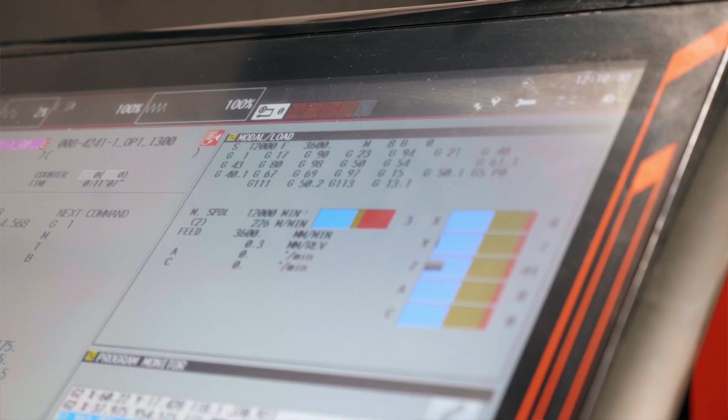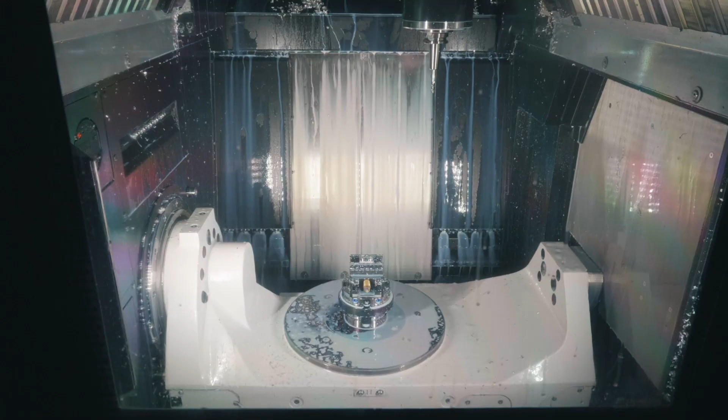As a small country at the bottom of the world, we are full of ideas, but as far as making them goes, we're a little behind. We need to invest in technology to compete globally. I could see the high-tech innovation coming down the pipeline and saw an opportunity to partner with those high-tech companies.

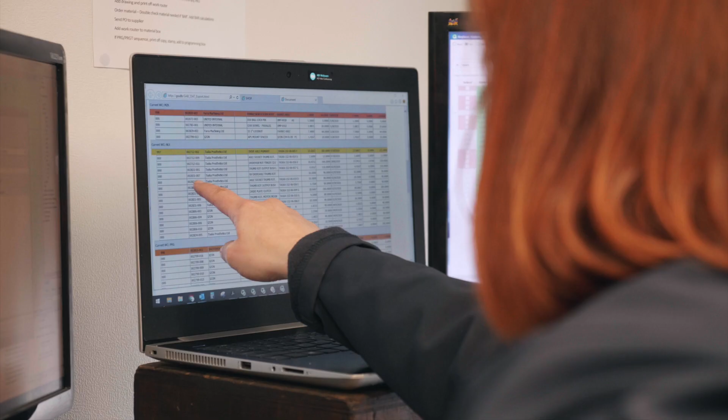With Sarah coming into the business, she really brought some of that professional services that we were kind of missing, as well as helping out on our operations management side of things and integrating our new ERP system.

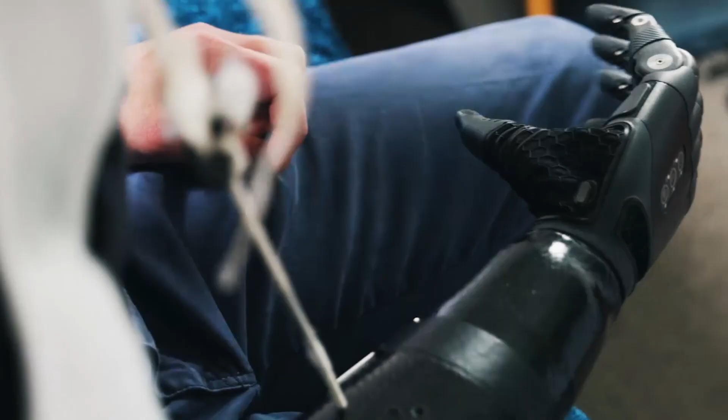Previous generations, engineering was something to aspire to and admired. Today it seems the attractiveness of the trade has been lost. But what kid wouldn't want to program robots and play with multi-million-dollar machines and get to make some awesome products like robotic hands? But there's no point in having a technology strategy if we don't also invest in our people.

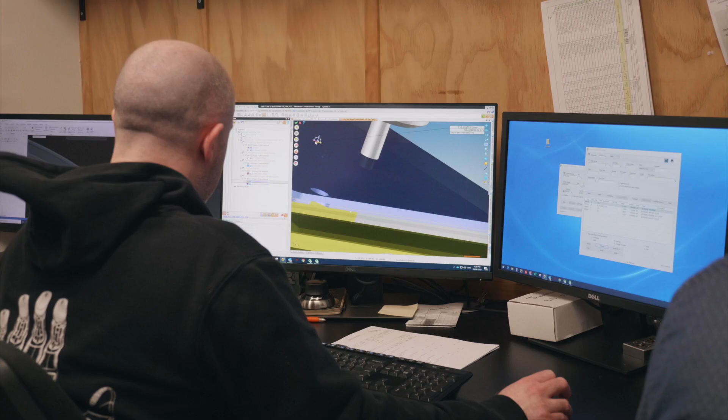Rather than automation removing jobs, it's creating more diverse roles and it's removing single points of risk. In my experience, all too often, all the knowledge is stuck in the owner or just a few people at the top's heads. It creates a real bottleneck and a massive key person risk. Not to mention, it's pretty damn frustrating and boring for your team.

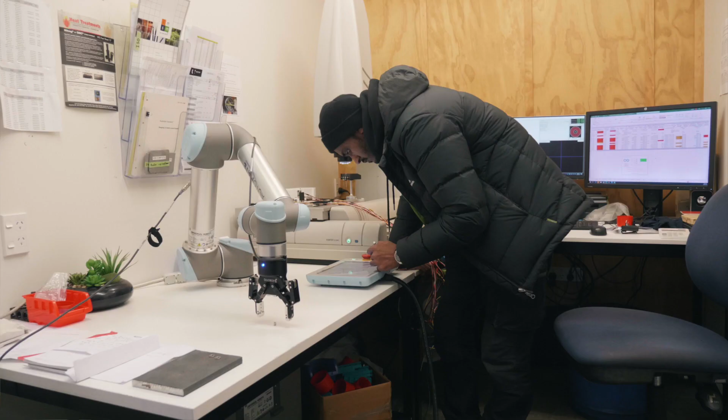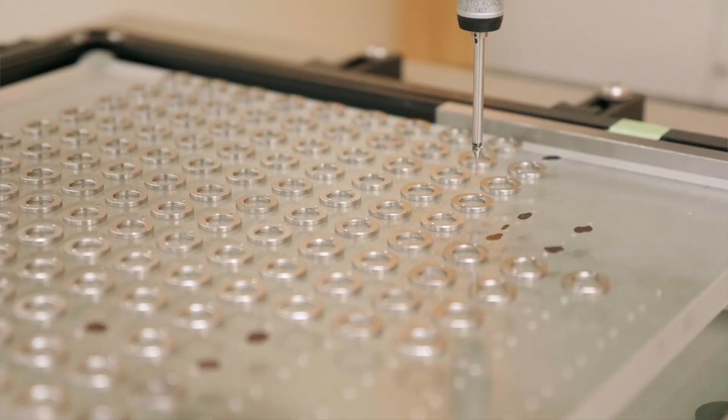I joined United in late 2019 through Callaghan Innovation's Student Experience Program. I have been investigating ways to automate the measuring of the micro-components we manufacture for Taska prosthetics. We make up to 7,000 components a month for Taska, and 100% of them need to be quality inspected. Some components have up to 14 check dimensions, and some as small as 8 microns, or 0.008 of a millimetre. We'd need a person working 24 hours a day, 7 days a week to manually measure them all.

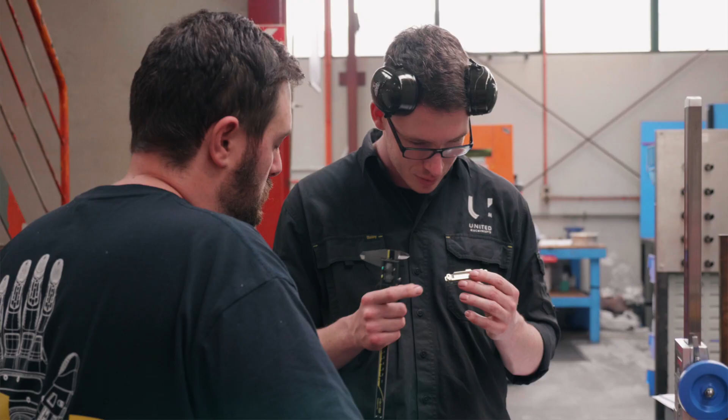I think one of the best examples of diversifying roles alongside investing in technology is Mike Thompson. Mike joined us when he was just 17, out of high school for work experience, and now 8 years later he's our foreman, and on a daily basis he can do anything from running one of our multi-million-dollar machines right through to looking after customers and quoting.

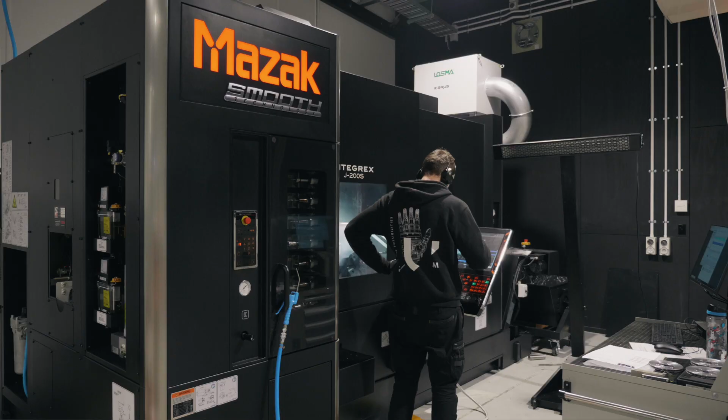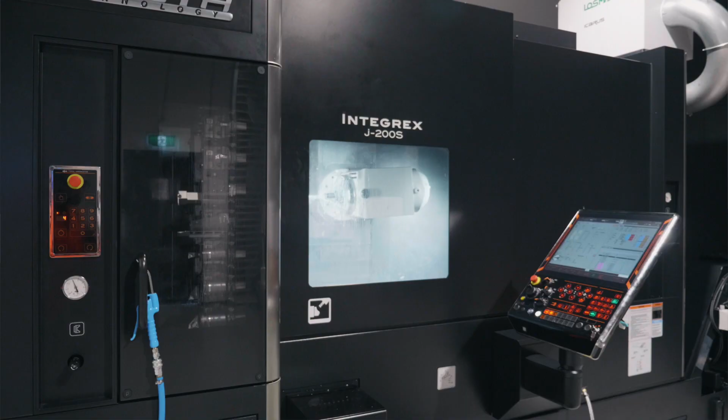Our newest machine, the Mazak J200S, is a beautiful thing really, offering done-in-one milling and turning capabilities. In other words, it's similar to a traditional lathe where we can turn a component, but also we have a secondary spindle which we can transfer parts across to automatically. All of this combined with powerful 5-axis capabilities means we can machine an intricate component in one operation.

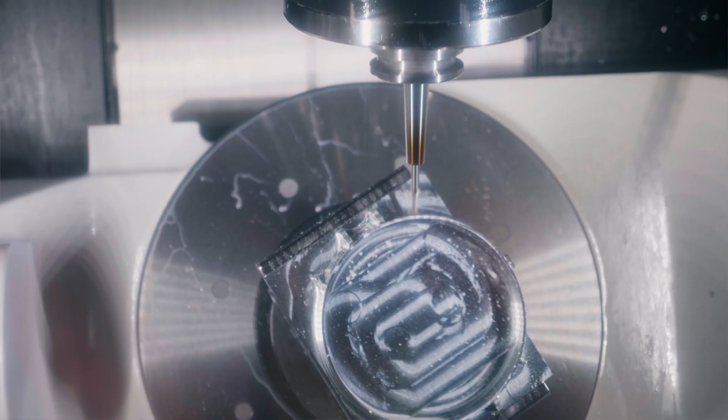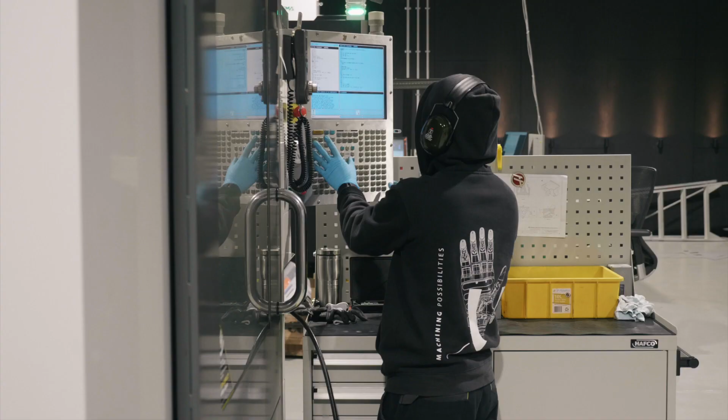So we were looking for more capabilities that fitted with our New Zealand high-tech manufacturing clients, who are traditionally really quite low volumes but high value work. We do a lot of 5-axis prototyping and short-run custom work for some of our clients, and before investing in our latest machines, this could create huge problems with production. Last time we prototyped a camera system for Shotover, we basically had to stop production for 3 weeks and work 24/7 to squeeze it through.

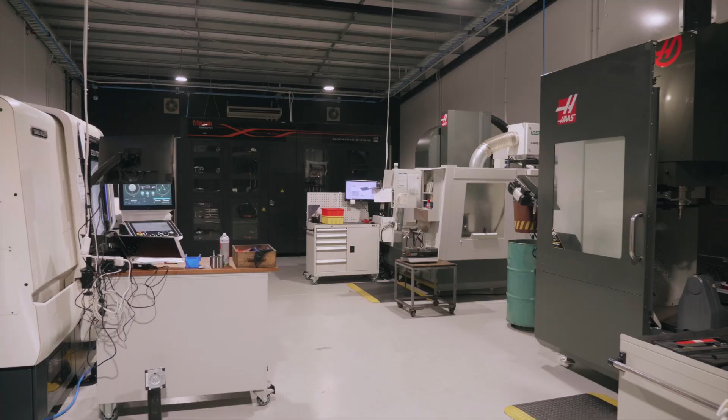But now, with our automated 5-axis machining centre, this has totally transformed milling production. We can actually stack up to 40 jobs, either one of each part or 40 of the same job, and it will do it lights out for up to 48 hours unattended.

Strategically, we've invested not just in new machines, but in lean and ISO operational processes, and most importantly, in training up a cross-functional team. For example, we now have 4 seniors that can all quote, program and prototype. This has given us huge gains in operational flow and removed production bottlenecks.

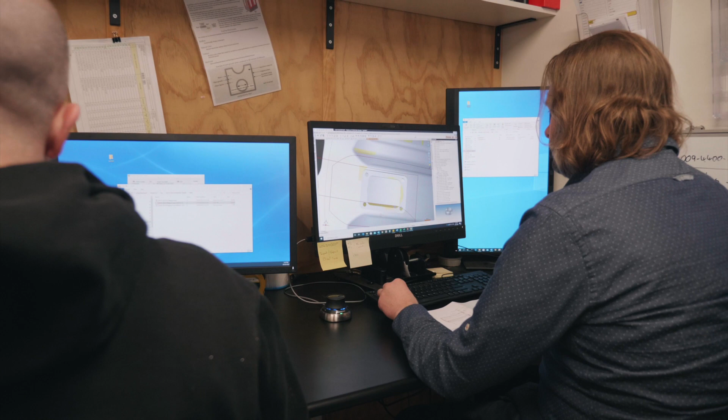We use a CAD/CAM software called TopSolid. A key advantage of TopSolid was it offers much more simulation functionality. And when you're putting an expensive part into an expensive machine, you want to make sure you're not going to have a problem. I program the part from the client's 3D design and then run a full simulation of it in the machine.

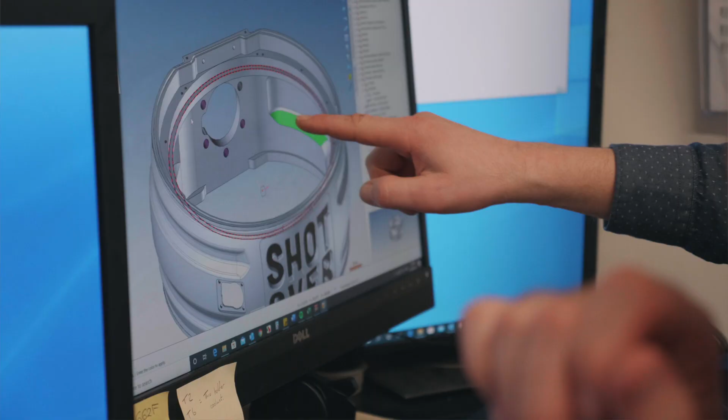We're essentially proving out the part before we even get it into the machine. Saves a lot of time and anxiety. TopSolid has a design module too. Often we'll discover some really easy wins in a client's design that will make manufacturing much more efficient. We're able to make these changes in TopSolid and export them to a 3D model suitable for the client to review and incorporate.

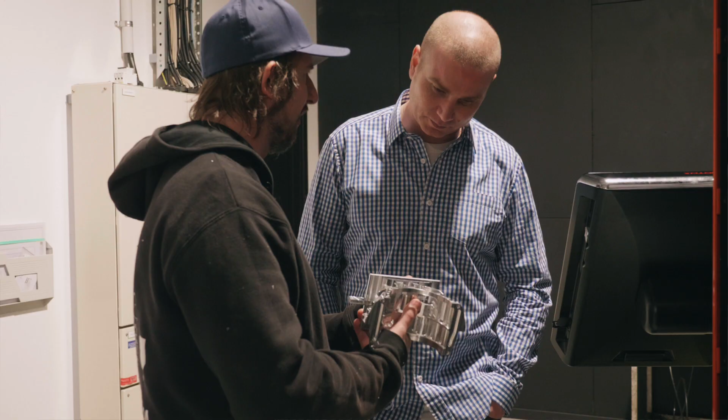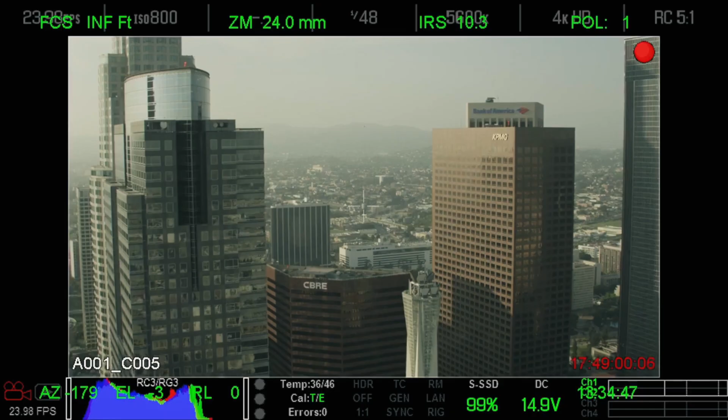Shotover started working with United in about 2015 when they got their first 5-axis machine. It's been a pretty incredible journey. We've been able to develop our skills and our teams work together to improve the parts, so it's been an important partnership for our business. Shotover provides high quality gimbal camera systems for the motion picture, law enforcement, TV news, broadcast markets. We make a range of products that vary in price from about $150,000 up to about $1 million.

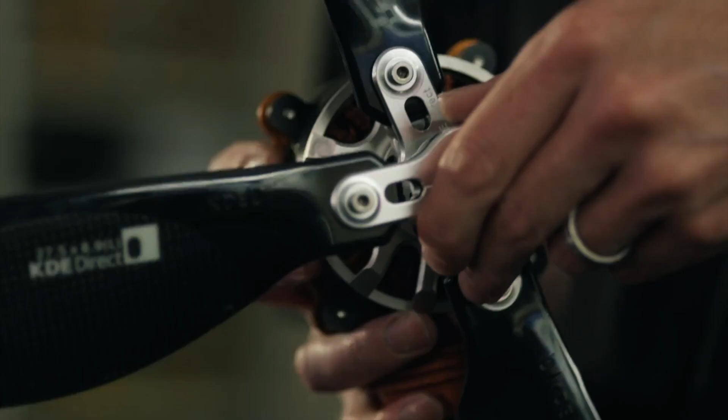We're a high value, low volume manufacturer, so it's important that we get our supply chain right so that we can manage the inventory on hand with the customisation, the cost for the customer, and then of course performance that the customer requires from us. It's important for us that we manufacture in New Zealand and we have a strong supply chain. Some of our runs are in ones or twos and we may never make those parts again, and sometimes we'll have something that we make 10 or 100 of, and we'll do that regularly.

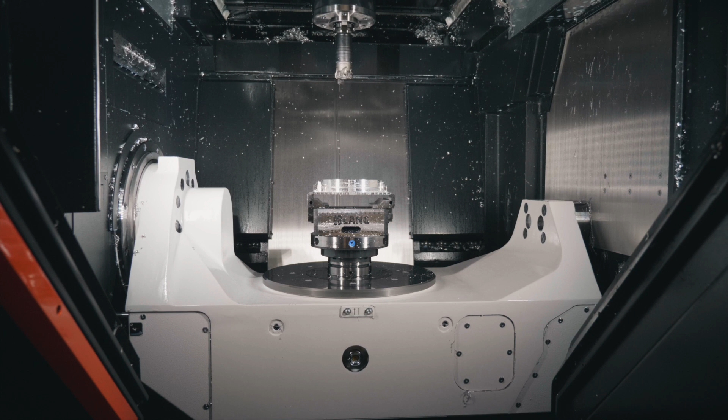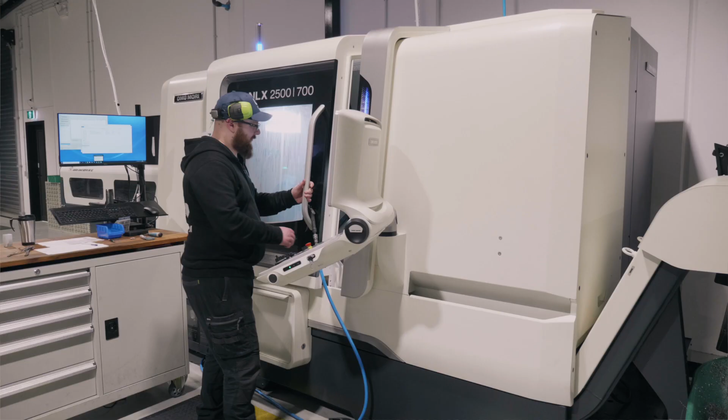So our team's grown alongside United's team. As our capacity and sales have increased, we've produced more product and they've had to grow and help us to meet that need. It's important that companies like United are investing in technology for New Zealand, especially for high-tech manufacturing. If we can't be producing high-tech, clever products in an efficient way, then the New Zealand way of number 8 wire, thinking outside the box, won't be possible. So it's important that that expertise is not lost and that we continue to make it a much more high-tech process than what it has been in the past.

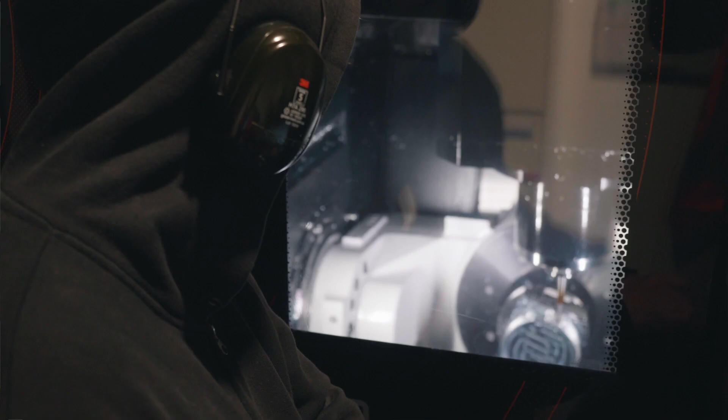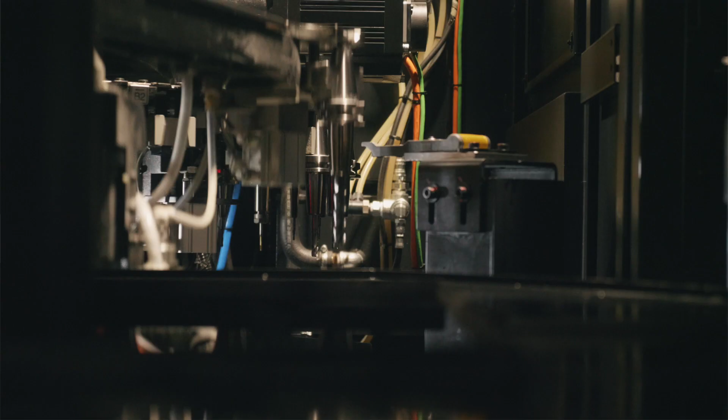I'm the main setter operator for our new workhorse, the 5-axis fully automated machining centre. When I get a new part or a design revision, I only have to prove it out and set it up on the machine once. It has 40 work holders and 285 tool holders. Both the work holding centre and tool holding centres have robotic arms that call up the right material and the tooling to feed them into the 5-axis mill.

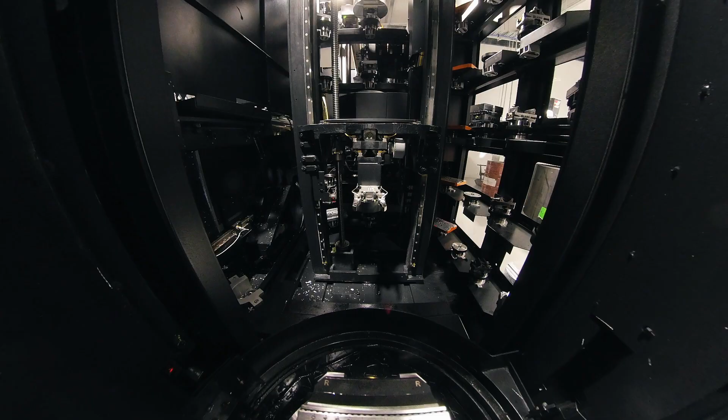In 1 week's machining now, we can be saving a lot of time. Setups traditionally were about an hour and a half, and now with the robot integrated in the machine, we're about 90 seconds. The other bonus is we can now make these parts lights out. It's a real game changer.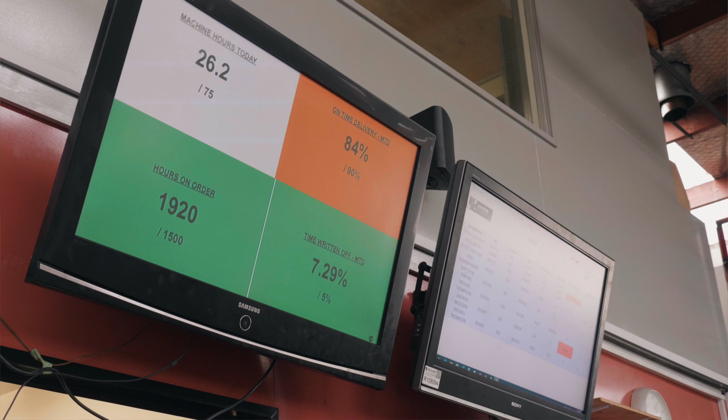We use a program called Global Shop. With it, we're able to provide our customers with a real-time production report. We also use it to display live schedule and KPI data on the shop floor. This allows us to have complete visibility of who's doing what, on what machine, what's next, and the delivery ETA. Our clients can access their data via a secure custom link which syncs every 5 minutes.

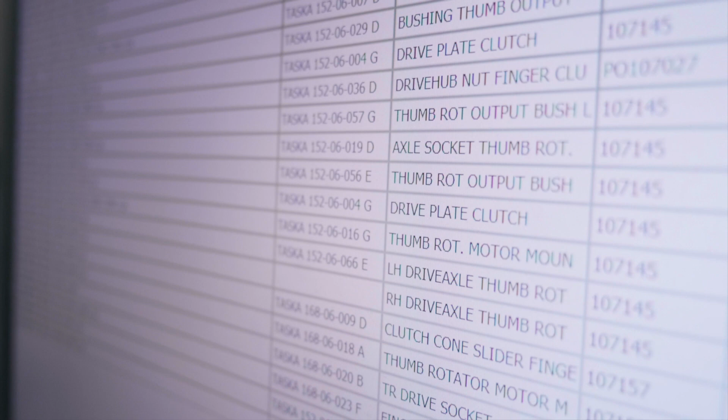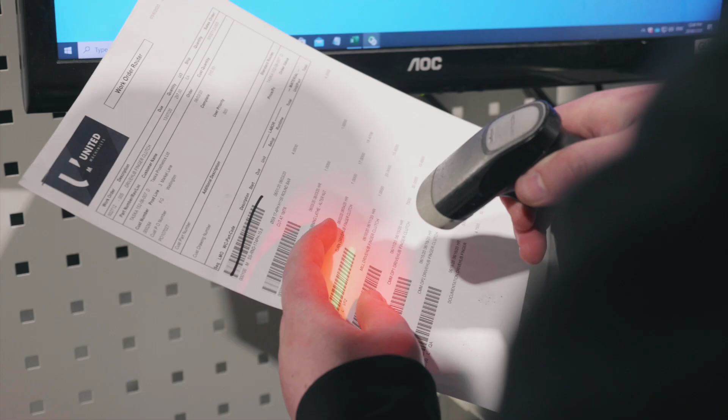We have what we call a router for each job. We design the routers not just as instructions on how to do the job, but to facilitate flow and visibility around the workshop. Each step in the process has a barcode. The guys scan the start and finish of each sequence, which bumps it onto the next stage. Digital will only get you so far though. You can't go past good open team communication.

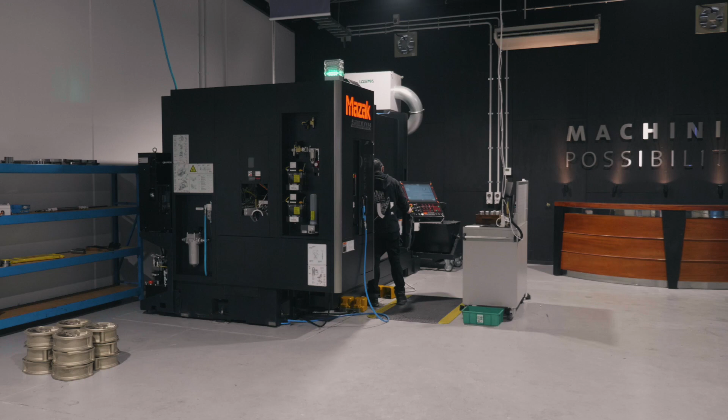We have a daily stand-up every afternoon at 2 p.m. Global Shop gives us the data we need and we use this to plan out the next 48 hours. It's only 15 minutes, but it puts everybody on the same page and on the same level. The stand-ups are a great example of the harmony you can achieve when you get people and technology right. We've worked hard to remove bottlenecks from the business that could cause delays on jobs and poor customer service. So while our latest expansion has involved significant investment in new automation, machines and software, it's been centred around designing a high-performing team.